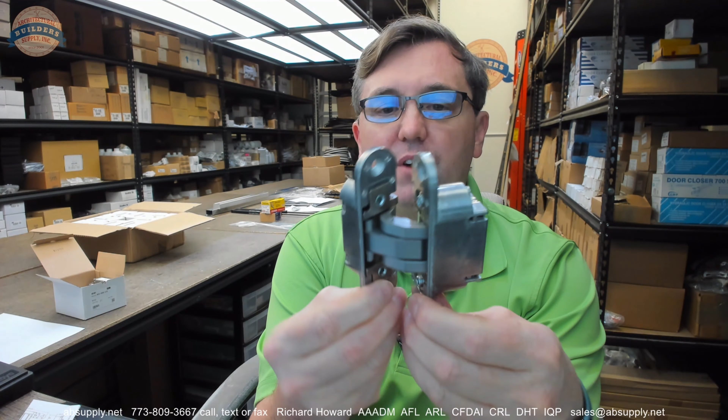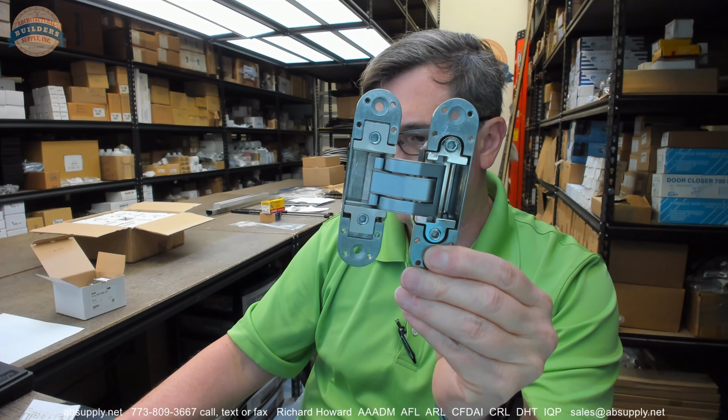They operate in such a way where they will provide an incredibly clean, finished look to the overall opening and aesthetic of what you're dealing with. This is a little bit smaller of a size, and I don't know the weight rating for this, but we're going to get to that when it comes to hinges like this.

So the entire premise of an MK80 type hinge, whether it be McKinney or anyone else who manufactures them... I'll tell you the McKinney is priced very well compared to its competition. I don't believe you'll hit a price point like this McKinney hinge.

The reason people like them is because they're able to adjust the door in the opening in 3 dimensions. They can get a little lift, they can get a little lateral, then they can get a little side-to-side adjustment.

And every time that I speak to people about these, usually the conversation is they're dreadfully fearful of using the classic hinge that is available in the market and has been for decades by Soss. Everybody knows the Soss name. There are people that are just dreadfully fearful of those because there's no concept of adjustability. Your mortising must be exactly spot on with no tolerance for deviation, period.

That prospect to many people, and let's face it, if you had 100 people who installed these hinges, how many of them are doing it for the first time? 90? Okay? So to the overwhelming majority of people, the concept of an adjustable option is absolutely, as soon as they hear that, they're like, done. That's the one I want. And that's the prevailing attitude with this type of hinge.

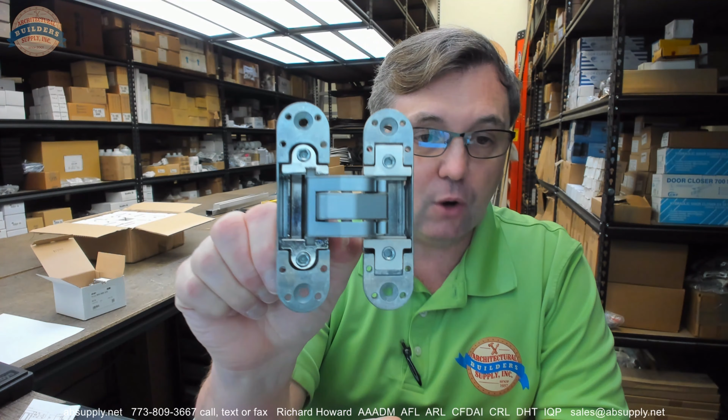Okay, but with this 3-way adjustable model, it substantially reduces the requirement of utter precision, and I think it substantially reduces the anxiety over that. It is a smart idea to be able to adjust something. I certainly don't deny that. My concern over this concept is you have mechanical fasteners holding the door in position. You are mechanically adjusting this hinge. What happens when the screws get loose?

Okay, that's my concern. I have spoken to a client of mine who has been using this concept of hinge for a decade, and I expressed my concern, and this gentleman in purchasing had told me he had never had a single complaint of that. So I was greatly relieved when I had heard that.

So this video is going to be a visual tour of the 80A. You're going to get a hinge. They're sold as each. If you buy two, they're going to come in one box. If you buy three, there will be one in a box and two in a box. Doesn't matter. They're just sold as each.

You are going to get the finish caps, and this is a satin chrome version. And in the satin chrome version, these are just plastic caps, and they literally push into the preparation on the hinge. You can see these 4 small holes. Okay, and they're just going to dress that off.

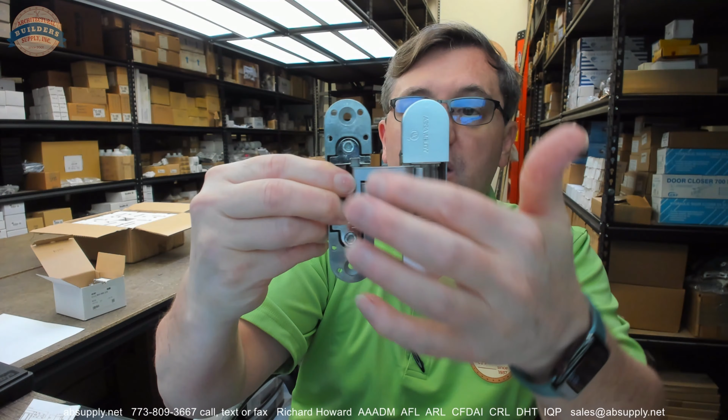And clearly, those caps are available in different finishes. The knuckle assembly has to be ordered in the proper finish, but the caps are just swapped out. So you'll get those in the color that you request. There will be 4 needed per hinge. 2 of them have the corporate logo. Now, what's interesting is they have the UL symbol on there. And that means that they are permissible for use on a fire-rated door.

That would be the reason for having the UL symbol on there, because there would not be... I'm not seeing a reference to fire rating in their paperwork, however. Yeah, they do not indicate that they're fire rated in the documentation.

The fact that they have a UL symbol and a letter F right below it means that it would be not only fire rated, but approved for positive pressure testing. The capital letter F is how you know it's positive pressure rather than neutral pressure. A lowercase f is neutral pressure.

I'm going to pause this video and ring McKinney right now and confirm whether or not this is permissible for use on a fire door, because obviously that's going to be a game changer if you can or cannot. So I'll be right back.

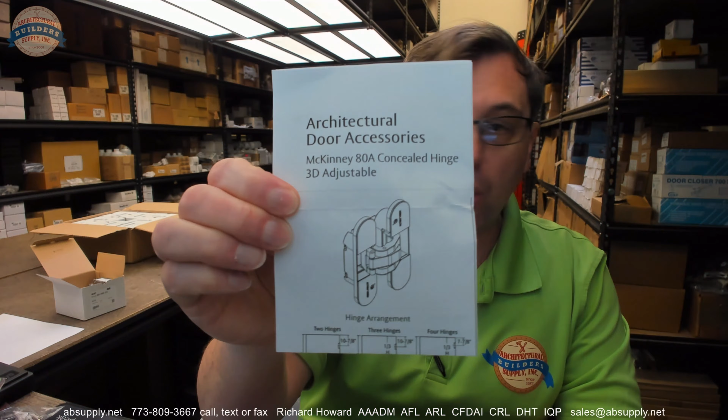So we're going to get those components along with the installation instructions, and we're going to go over those in this video here. And the customer service rep is typing, and they've stopped typing. So while I'm waiting for this answer to come back, what needs to be immediately understood about this premise of hinge is 2 things come to mind.

When you have an overhead stop, okay, McKinney has sister companies that manufacture overhead stops. That overhead stop must be ordered. They've told me that they have to email me the answer. Okay. So the rep has told me that I need to email tech services, so if I get that answer during this video, we will obviously have that answer.

So when you are dealing with an overhead stop, you need to order the overhead stops and specify the means of hanging the door. If it's hinges or 3/4 inch offset pivots, I wouldn't worry about it. Your template's going to work out of the box. If you're doing a concealed hinge like this, you need to go to your overhead stop people and say, I need this overhead stop for this application.

I've got a door so wide, and this is the hinge it's hung on, because the templating is going to change. You can count on it. Don't count on it being the identical templating. I've had people install material with standard templates and then use concealed hinges, and they say, well, the door swings, but you can tell it doesn't swing fluidly. It seems to grind or slide or get hard as it opens, and yeah, that can be expected.

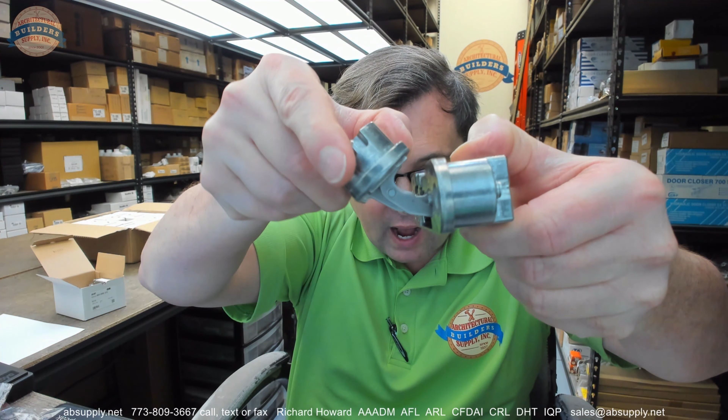The reason is because if you just focus on the center of our hinge, on this point where the intersection would be as I open and close the hinge, with a hinge or a pivot, center hung offset, the vertical axis of pivoting is a static plumb line. It doesn't move. With a hinge like this, that vertical axis of pivoting actually moves, okay?

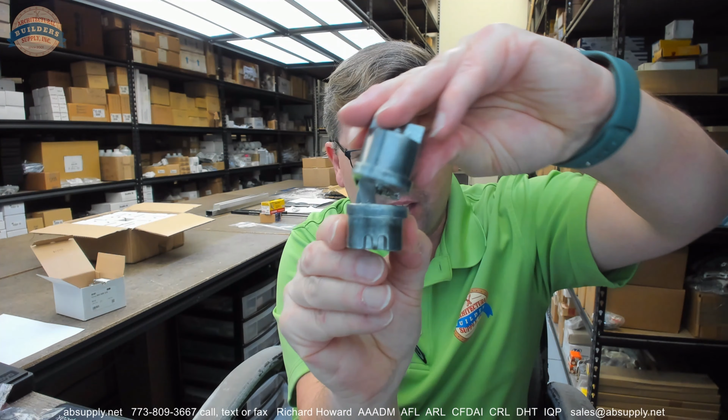And that's the problem that you have with not calling it out. Now, the other problem with not calling it out: you won't get the template. Now, you can get the template. You want to make sure it's going to work, but they will cost more.

And I don't believe there's any change in hardware, but the reason it costs more is they have to do paperwork, or they have to confirm, verify, research, things of that nature. So that's absolutely crucial when it comes to these hinges.

The other thing that's absolutely crucial when it comes to these hinges is you can see when the door is closed and then you open the door to 180 degrees, this is a very fixed amount, okay? This is a situation where the back set of the hinge, as measured from the pull side, so not the hinge back set, but the dimension from the pull side of the door to where the prep starts, can only be up to a maximum dimension.

Otherwise, you'll go to open the door, and then all of a sudden the outside corner of the door will have a conflict with the frame. So observance to the template is mandatory for that dimension, that you do not exceed that permissible dimension. So those are the two major caveats with this material.

Why is that latter an issue? Well, if you have some chair rail on a wall, if you have some sort of applied molding, if you have a deep inset, this hinge is not going to work. McKinney's line of three-dimensional adjustable hinges is garden variety material. They do not have a broad offering of what are ultimately very unusual hinges to account for applied material.

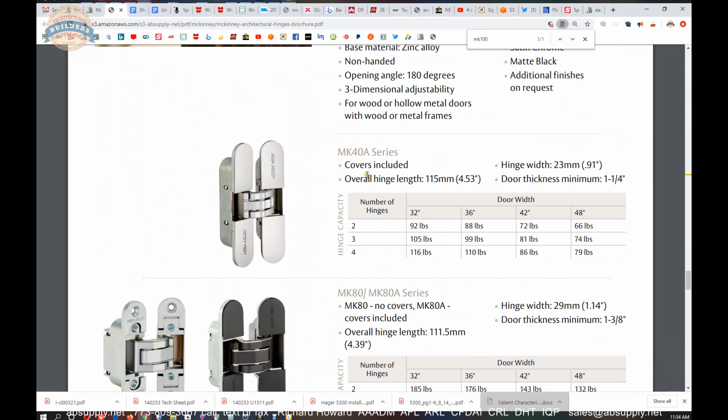Okay, so this is the item that we're looking at, and by the way, I did get a response from our tech support contact at the manufacturer, and they told me that the MK80 and the MK100 are indeed rated for 20-minute applications. Okay, so we have an MK series. We've got three hinges. The MK40 is not rated at all. The MK80 and the MK100 series are 20-minute rated.

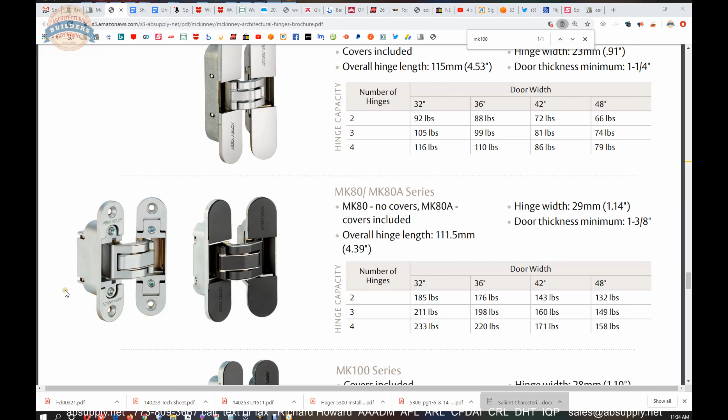You'll see that there's an MK80 and an MK80A. The MK80 does not include our finish covers. Okay, so that's going to have a different look to it altogether. Probably, and we'll explore it, but probably very little price difference between the two. So fire rating on the 80 and the 100 series. So here is our item, obviously shown here in the black finish.

That, of course, is an important area in which to start, whether or not your door is fire rated. If you have something that's beyond 20 minute, you have to, of course, have hardware that is listed for that type of application. This McKinney hinge is definitely labeled on the back side of one of the two leaves, which would be required for a hinge like this to actually physically bear a label.

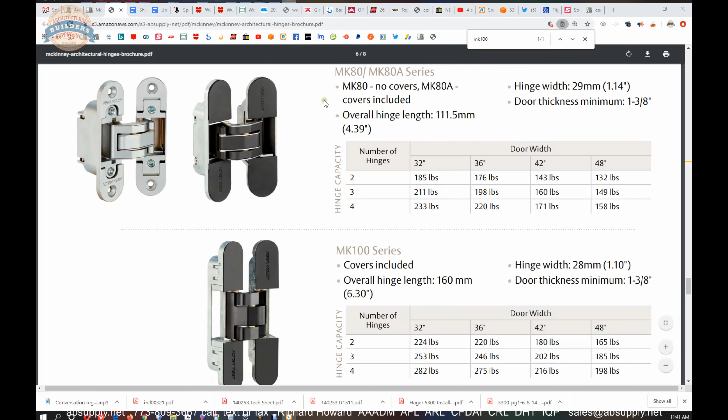And while I saw the label on the material and of course on the faceplate, it was of concern that it wasn't in the published documentation, which is why we reached out to double check. And plus it doesn't indicate a rating on here, so eliminating the guesswork and the lack of clarity about what it's rated for, now we know. So we're focusing on the MK80. Let's switch back to our item as seen here and work our way down.

Concealed hinge, satin chrome. This is obviously the black finish. Refined, minimal McKinney concealed hinges feature 3-Dimension adjustability for easy installation and door alteration. The snap-on covers conceal the screws for a clean aesthetic look, and that's what the MK80 does not do.

Concealed hinge, covers included, zinc alloy is the base material. Satin chrome would be a reference to the covers and the knuckle of the hinge finish. The size of the hinge, we're going to go over that when we take a look at the template. Your door will go to 180 degrees. You can go with a plus or minus 2 millimeter height and side to side with a lateral depth dimension of plus or minus 1 millimeter.

So 1 millimeter, to put that into perspective, 1 divided by 25.4 times 1, so it's 39 thousandths of an inch that you can move it. And obviously with 2 millimeters it would be 78 thousandths, or just heavy on a 16th of an inch. And that's certainly nothing to shake a stick at. If you want an adjustable hinge, that is going to give you some adjustability. There's no doubt. It's more than a 16th, and it's about a 32nd in the other direction.

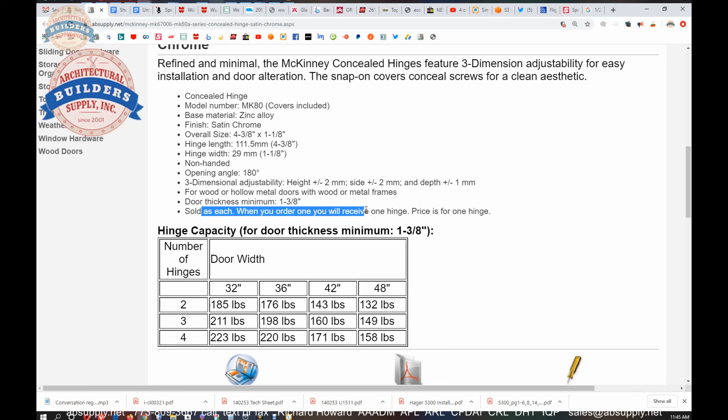This is another caveat, a minimum door thickness, which is the case for all means of hanging a door, whether it be a pivot or a hinge or a concealed hinge. They all have a minimum thickness, and this does, of course, too. Sold as each. When you buy one, we're going to ship you one. If you need 3, great, you can order 3, not a problem. And this is where it starts here, with how many hinges to use.

And what's nice about these is that they will handle a very generous weight range. So just 2 hinges are rated for what would be considered a quite heavy 3-foot door. So you're going to be able to easily handle 3-foot doors that are going to be incredibly heavy. You might even be able to do a simple 32nd lead-lined door. I'd have to look up what that weight is per foot, but you could probably hang a lead line door with it as well.

You can see, however, as the width increases, your weight capacity decreases, and that's pretty standard. That's evidenced by best practices as they are outlined in our industry. When your door gets wider than 3 foot, and most certainly 3 foot 6, 42 inch and wider, you're going to be at a taller hinge so that they can compensate for the wider door leaf. So you'll go from a 4.5 inch leaf to a 5 inch leaf in these areas. Okay.

So this is a very important document. Let's go back to the product brochure and make sure we haven't missed anything on that. Well, actually, from the beginning, this is a relatively new sort of publication from McKinney, and they've gone in an interesting direction with gravitating towards the ability to cater to the market when it comes to more unique solutions, perhaps more elegant looking solutions. A flat tip is in essence a button tip on your hinge, but that's clearly more decorative.

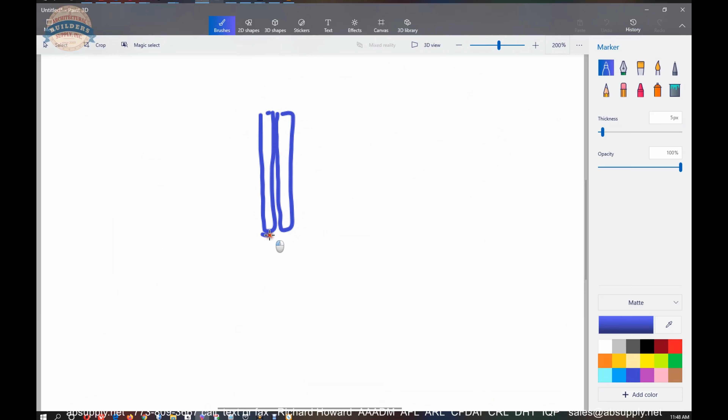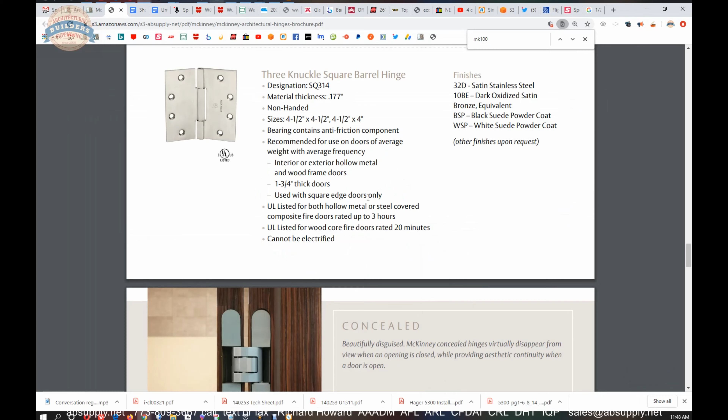Forgive the awful artistic rendering, but that hinge knuckle is going to literally look like this. It's going to look square so that when you're looking at it in elevation, you're literally seeing a square profile. Okay, those must absolutely be ordered as square or beveled, because if you imagine in your mind's eye how that door leaf is going to sit on the door, whether it's square or beveled, it's going to affect how those square knuckles in the 2 knuckle hinge line up.

A 3 knuckle version as well. Really nice looking stuff. Then of course they're concealed material, non-handed, so they can go left hand, right hand, doesn't matter. Flip them around.

3D adjustability. Your weight capacities are here, your minimum door thickness. Now, if you're doing full-size doors, the MK100 is really going to be more typical in a commercial setting, most certainly. I would say that if you're doing residential material, the lighter duty material would certainly be possibly more appropriate, or even the 40 series, because interior doors in a home are not going to be fire rated.

With the exception of possibly that garage door, the attached garage door to the house. That might need to be 20-minute rated or more. Depends on your local code. But let this information drive what direction you head in.

I don't see any trouble with weight rating on the MK80 if you're really residing in the 3-foot area. You get out here, you're really not going to see 4-foot doors that are going to be comfortably 158 pounds. 4070, 4080 - I really think you're going to be at the 100 series for commercial. That would be my option.

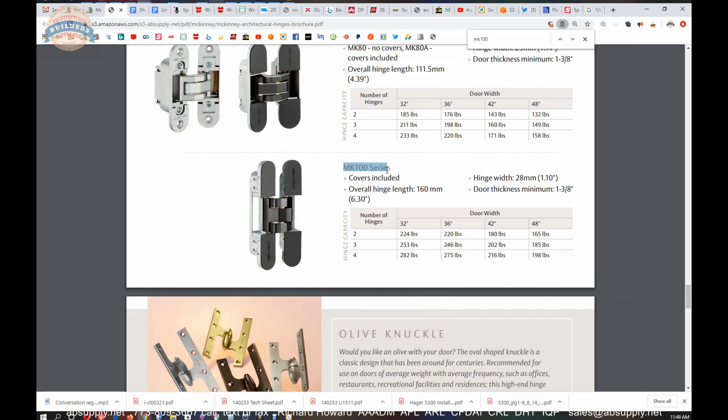I would prefer to have more hinge rather than less hinge when it comes to the lifespan of the opening. Olive knuckle hinges are neat. They're alive and well. I remember the first time I mortised a door for one of these, back a long time ago.

I stared at that template for probably a half an hour before I put my router around the door, just to make sure, because the problem was it wasn't referencing a center line on the template, and I needed to breach the face of the door for my leaf, and that baked my noodle for a little bit. But getting through that, learning how to read templates, is really the key to success, which of course does dovetail us into being able to machine for this material.

So let's move now to the installation instructions. Now we're moving on to the installation instructions.

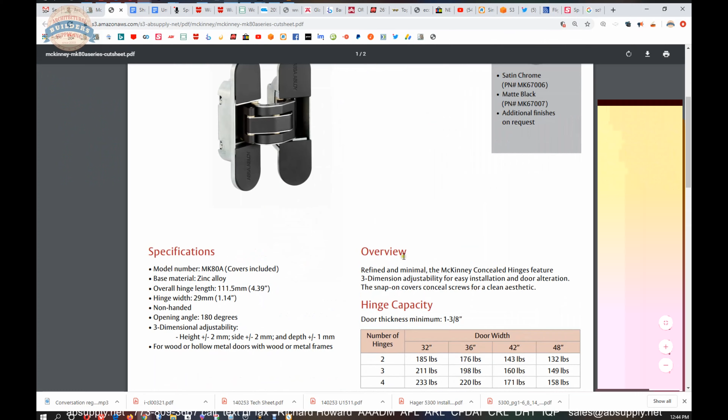Let's get the cut sheet first. There's probably not much there. It's a redo of the product catalog, basically. It's got a lot to do with the installation instructions as well. Shows you the dimensional properties that you're going to be contending with.

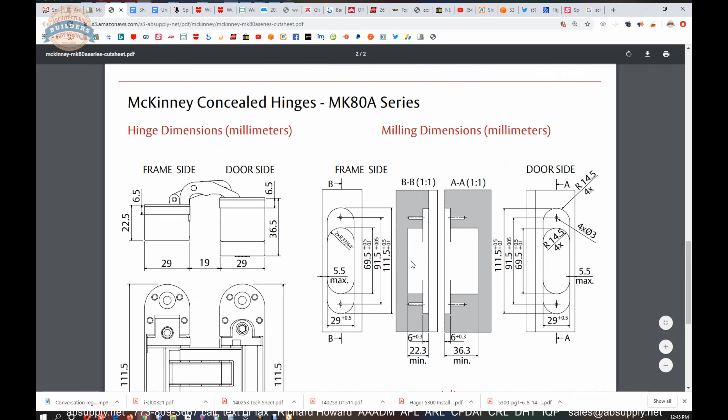25.4 is going to be the important number moving forward, and I'll explain that in a moment. But if you're going to include this paperwork in a submittal package, here would be your document.

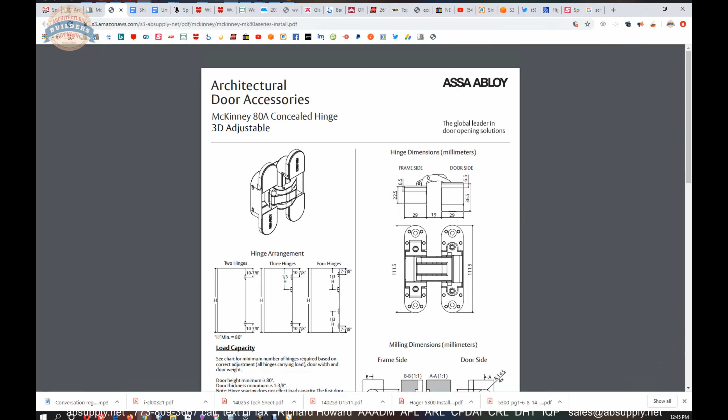Now let's tackle the installation instructions head on. So I've prepped for these, I've mortised for these. It's easy stuff - you just have to do what the template says. In terms of mortising this material, there's not a tremendous challenge to it, really at all.

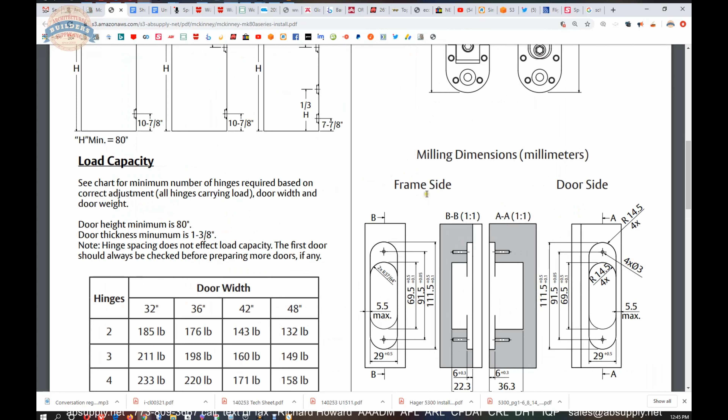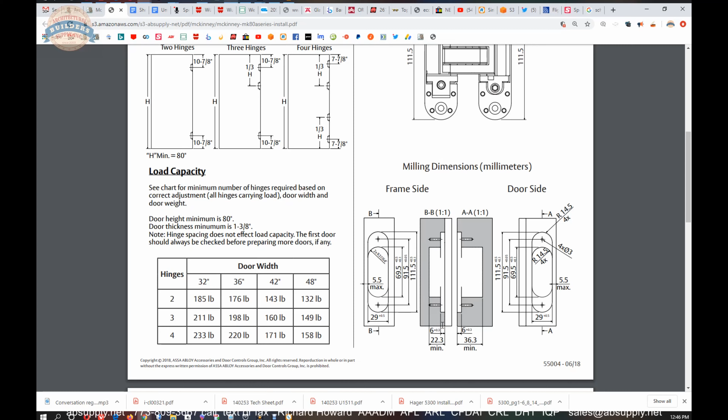What I find is you're going to make yourself a template, is what you're going to do. I'm not aware of McKinney having a template for these at all. Let's face it, door manufacturers that are going to be prepping for this material are going to use a CNC machine. There's no doubt about it. However, let's just imagine you don't have one of those in your back pocket.

You're going to be doing it by hand. So you'll make your own template would be my recommendation.

The way that I would go about doing it is I would drill myself a hole to achieve the 14.5-millimeter radius. I would just literally take a piece of 1x poplar, and cut it to the size that I wanted. I would prepare it in such a way that I had 5.5 millimeters from the pull face of the door to the face of the frame, and that's where you've got to have an understanding of what is your inset.

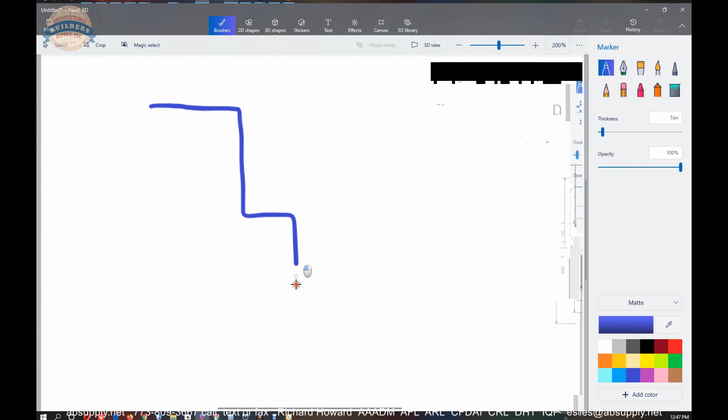So you'll have to account for an inset. You might determine your inset and you're going to have to adjust accordingly, because what I mean by inset is the face of the door. Let's just say this is your frame, single rabbet frame, whatever the case might be. Your door is going to sit in here. Here's an exaggerated bevel - the inset is the dimension from the face of the frame to the face of the door.

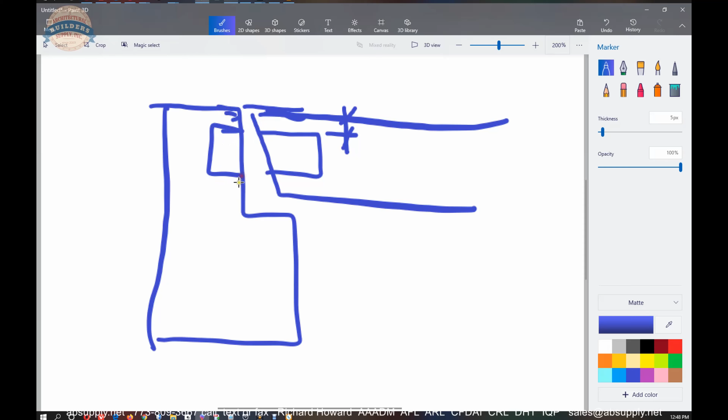And what they're saying is your prep cannot exceed that 5.5 millimeter dimension from here to here. So you have to add to that, obviously, what your inset is going to be when you're going to translate that template to the jamb itself, so that you've got 5.5 millimeter plus whatever your inset is, so that you can get your prep on the center line there.

So I would take a piece of 1x material. I would give myself a 14.5 millimeter radius prep here and here. They're saying that it's a 37/64 radius for the body, a little bit wider.

Or maybe it's not wider. Yeah, a little bit easier. Well, we can just translate it. Let's figure it out right now.

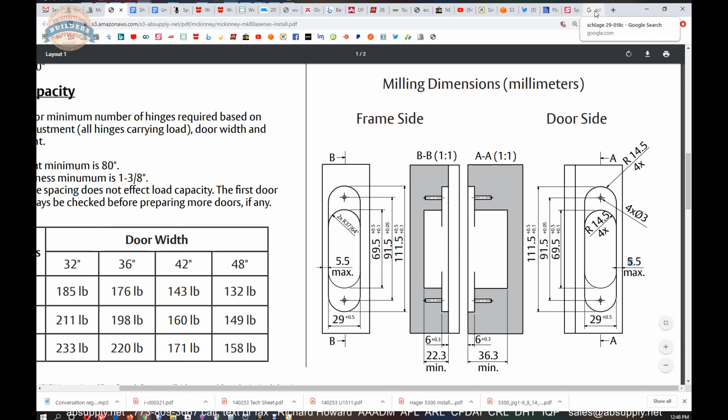So here they are at 37/64. That's the only dimension they have tossed in here. That's an imperial measurement that I see. Forgive me, I was thinking—I wasn't paying attention close enough.

So you've got a 14.5 millimeter radius. You know, obviously that's 0.57. So 0.5625 is 9/16. That ought to work for you.

I did not grow up when metric was taught in the school system. I don't know if you can get a 29 millimeter hole saw. If you can, that's what I would buy to make myself this one-time template.

And then at that point, what I would do is mark my 4 holes, and the way that you have to choose how you're going to do this.

So you can come up with a block so that you are not routing into this area when you do the deeper body prep.

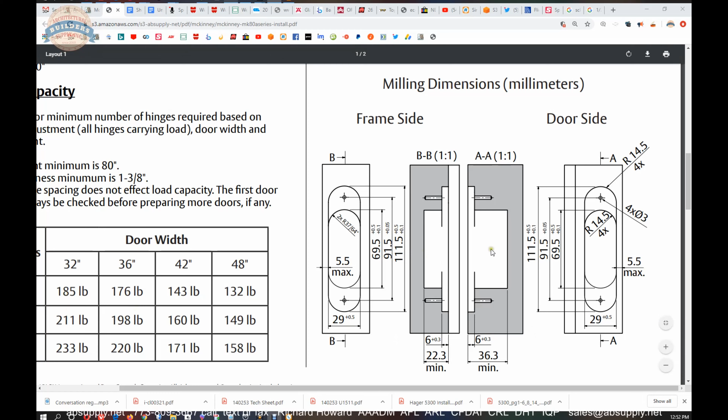So you're going to need, or you might just use two templates perhaps, or you could also come up with an insert that you would place inside of here to limit your router from going any further.

The issue with that is you're not going to have this type of graceful mortise unless you got super fancy. If they exist, a 29 millimeter diameter, 2-flute carbide bit, you might be able to toss that into your plunge router. That's interesting—a 29 millimeter router bit.

Yeah, I'm definitely not seeing that come up instantaneously here. So I'm definitely not seeing that. Going to need to come up with how you're going to go about doing that. You might use two templates.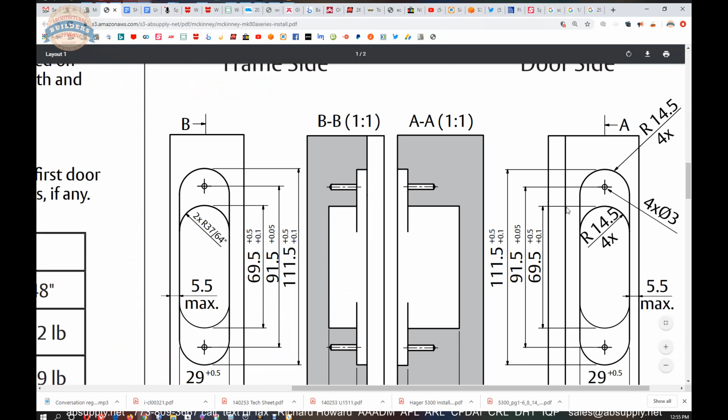I know there's another manufacturer that has an inserted pin. The issue with that is, so as you move forward, the way that you will ultimately end up doing this is how you'll achieve it.

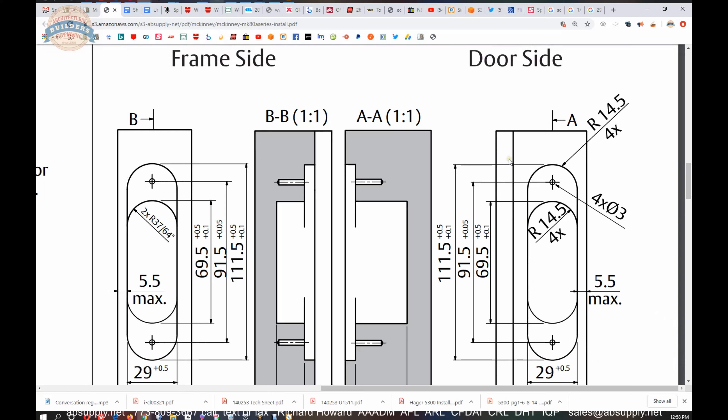I would just be using a template that I would be able to apply to the edge of my door. Obviously, a template's going to have a couple of inserts where you'll be able to physically nail the template down to the edge of the door. How you'll end up going about fixing it down to the door.

Yeah, nails are generally what's used to do that. You might try to not pierce the edge of your door. Depending on the construction, you might find a different way to do it, maybe clamping it to the door. So you're going to need to, and I like to use a plunge router, just a 2-flute 1/2-inch diameter plunge router.

Now, if you were to have a hole drilled in the edge of your template and you inserted a roll pin into it, or a nut and a bolt or whatever you would insert through there, if this area here and here and here and here was not radius like this, it's not going to be the end of the world.

Because it doesn't matter. Just so long as, if you were to basically cut this straight across, it's really not going to change anything on the hinge prep whatsoever. So I wouldn't hesitate in doing that if it served getting it done better.

And if you were to do that, you might insert a couple of rods, not worry too much about the prep on the inside corner, and have a nice easy prep. Then the only thing you have to know at that point is how thick is the faceplate and how deep to make the pocket on the door and jamb.

And you can very easily use your stop on your plunge router to get you your depth. 22.3 millimeters, 36.3 millimeters. Then your plate thickness is 6 millimeters plus, I guess, a third, or 0.3 millimeter, I guess is what that means.

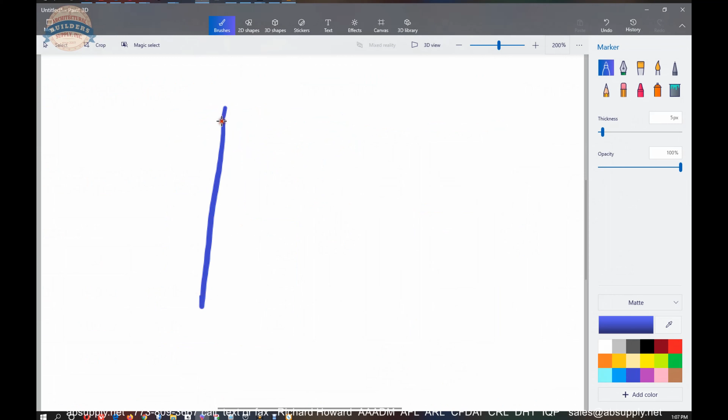So if you're doing a door and frame and you have—you've got a door, that's awful.

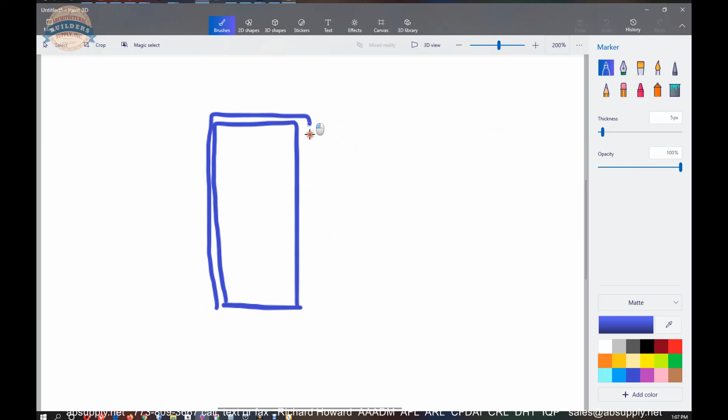You've got your frame. Okay, the question becomes what's the margin in here? Is it 1/8 of an inch? Great. So what you measure underneath on the underside of your head to the center of your prep, when you translate that dimension to the door, deduct it by 1/8. And then you're going to be perfectly in alignment. There's no way to get it wrong.

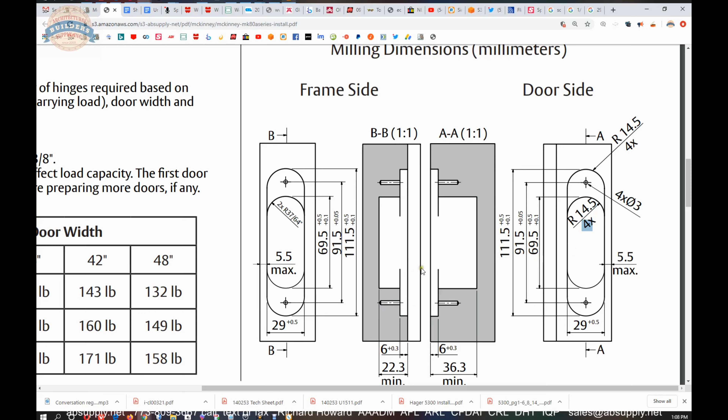In fact, when you mortise it that way, you're not going to need any of the adjustments. And in fact, I think the adjustments will become a bit of a hassle because you have to adjust it. So at the end of the day, that's what we're dealing with. So that's the hard part of the entire installation process that we just blew through. Let's start over with the easier stuff.

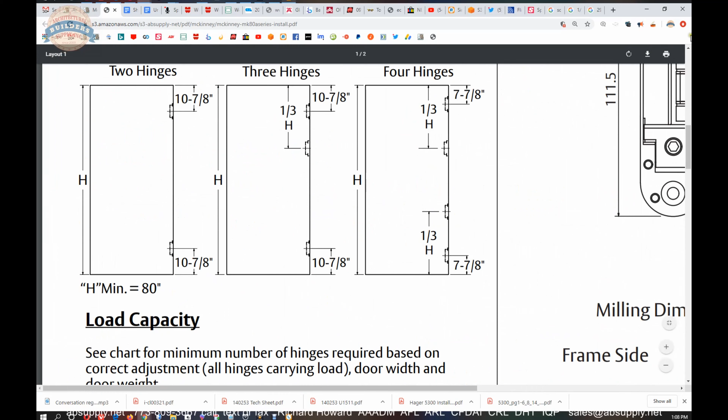You're seeing right here the factory's recommended placement for 2 hinges, 3 or 4 hinges. Now what you're going to notice is the location for 3 hinges. They want you to soldier stack those. Well, not soldier stack, but you know what I mean. Bias the middle hinge towards the top of the door by coming a third of the way down.

The issue with that is that's not going to meet the criteria for industry published standards for location of hinges. So I would be cautious. If you're doing wood doors, I would contact the wood door manufacturer before selecting these hinges and get in writing that any warp in the door will not be attributed to a location of hinges as laid out here, okay?

Because industry standard is for doors up to 60 inch, you use 2 hinges. For every 30 inches after that, you add another hinge. Well, the problem is we're going to have more than 30 inch in this space. I mean, you're going to have more than the margin of adding another hinge. So I would want to get that clarified before I move forward.

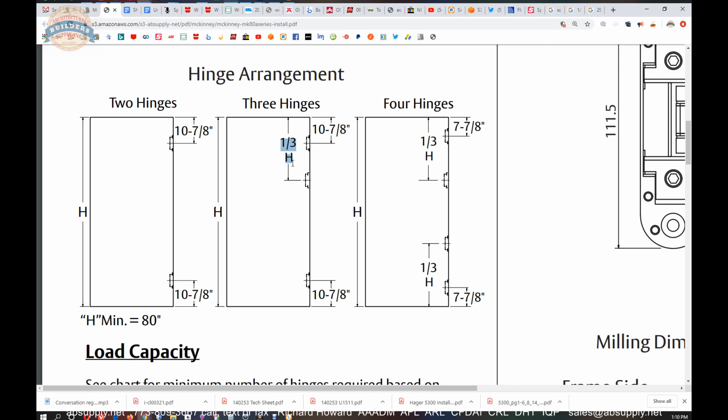But you'll see these 2 hinges at the top as standard practice for places in Europe, or if you've been on a cruise boat, you see it as well. And the reason you see it on cruise boats is because many cruise boats are built in Europe. That's where they put the hinges.

Your load capacity is mentioned here that we talked about earlier. It's important to note they say the hinge spacing does not affect load capacity. The first door should always be checked prior to preparing any more doors. So where you locate the hinges are not going to affect your load capacity.

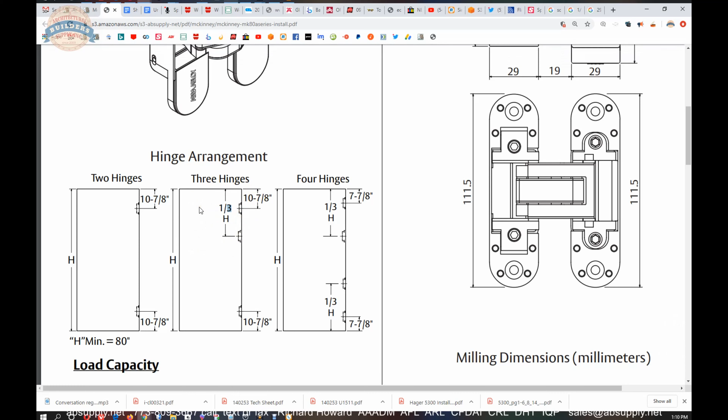And that's because you're biasing that third hinge towards the top. 70% of the weight of the door is borne by that top hinge. So if you're going to have 2 hinges or 3 or 4 and you're observing this chart, no, because the placement of the hinges is directly related to the load capacity. So if you were to change the locations here, then all of a sudden this statement is not necessarily accurate.

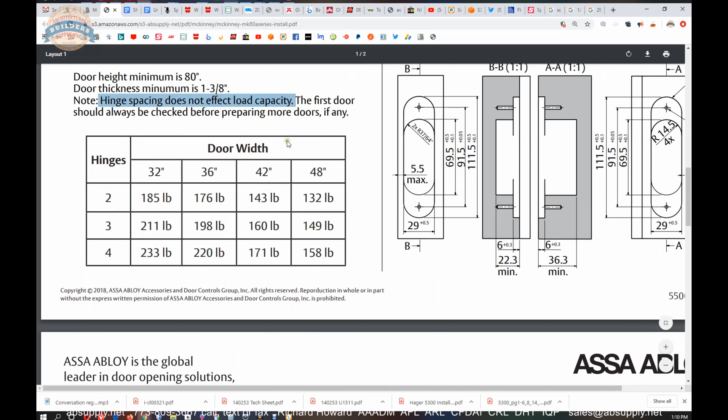Minimum door thickness 1 3/8, minimum door height 80 inch. I don't see why you couldn't put it on a door that was 6 foot tall. I don't see a problem with that. But what they're saying is prep your first door, double check everything, make any adjustments, then proceed.

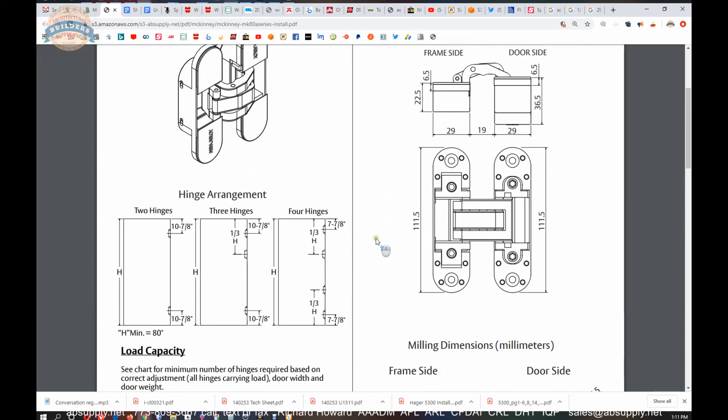Okay, so we've covered the first page. They give you those overall dimensions, but everything you need is here. Now I had said 25.4 is an important number.

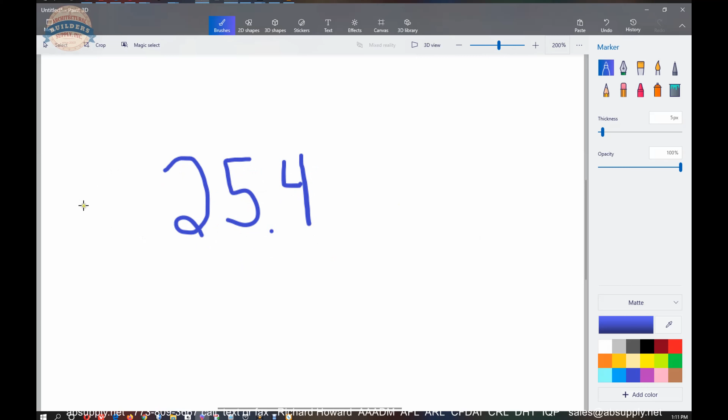The reason it is, because, as I said earlier, I didn't grow up being taught metric, but there's no reason to have a problem with it because of 25.4. If you're in the door business, you understand decimals. Well, metric is nothing but decimals. So 1 divided by 25.4, multiplied by whatever number you need.

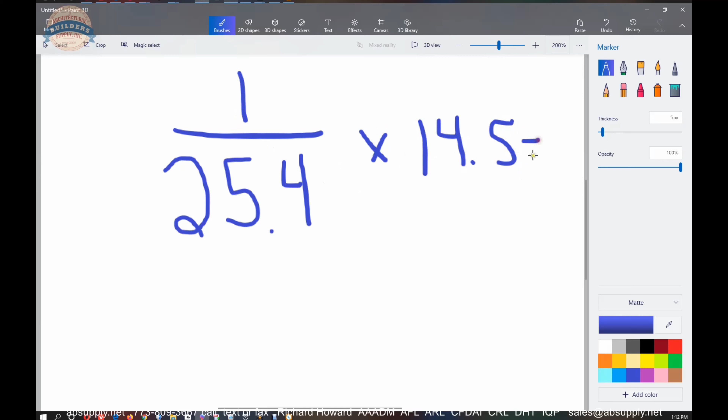So if you wanted to find out what 14.5 millimeters is, 1 divided by 25.4 times 14.5 was that 0.57 number we had earlier. So again, just 1 divided by 25.4 times 14.5. Okay, it's 0.57. And in my head, I know what 9/16 is. It's 0.5625. So I'm just going to be heavy on that, like a 30-second heavy on it.

So the point is when you're looking at that template, if you need to break it down into these numbers and then look at your fractional chart, and knowing what fractions break into to decimal points, that's how I do it. I don't have millimeters memorized. I have no reason to memorize them because I can break that math down.

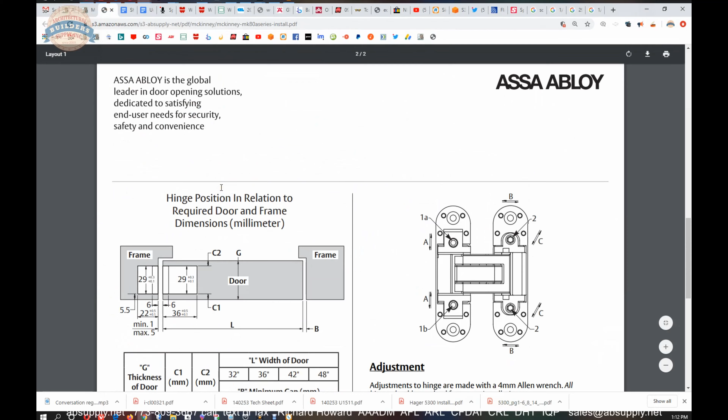Here's a great little cross section showing again what we're contending with, but this is just a regurgitation of what we've gone over. But they're giving you the information laid out in such a way that you can relate it to different door thicknesses. Now, and I have a comment about this. They have door thicknesses, 1 3/8, 1 3/4, 2, and 2 1/4. They have a C1 dimension, which we know is that crucial 5.5 millimeter.

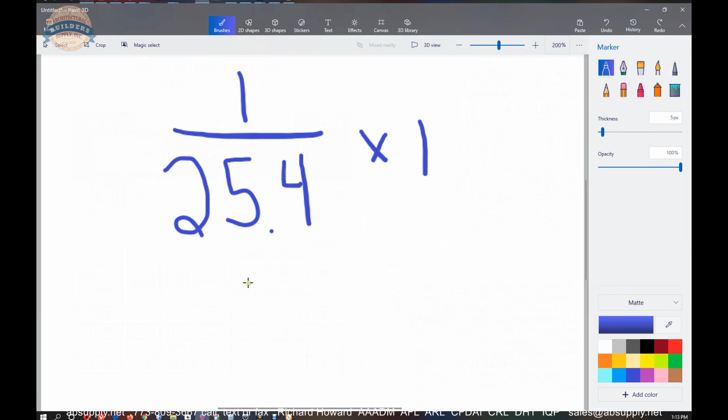And they're also giving you a C2 measurement. That's nice, but I wouldn't touch that C2 measurement. The reason I wouldn't worry about that, as long as your C1 dimension is absolute, the reason that I wouldn't worry about C2 is because a 1 3/4 inch thick door does not equal 1.75. If you put your caliper on any door, I guarantee you that 99% of the time

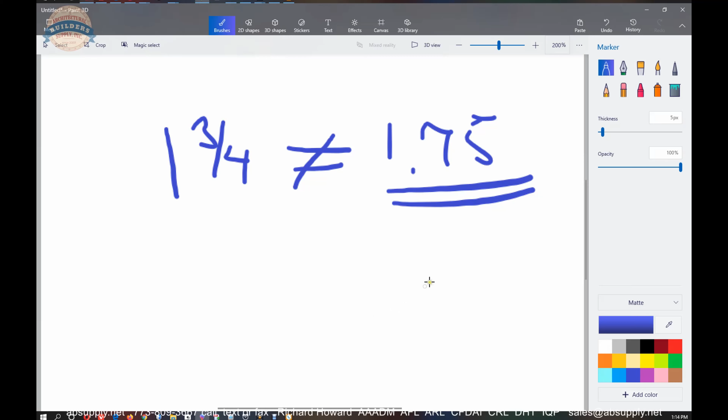it's not 1.75. Fire doors are going to be 1.71, 1.72. 1 3/8 doors, 1.31. 14 gauge steel stiffened doors, 16 gauge steel stiffened doors, 1 3/4 inch, yeah, they're 1 7/8. So my point is, I would take C2 as a reference, but not an absolute, whereas not exceeding 5.5 is an absolute. Let's switch to the screen view where I can demonstrate why it's an absolute.

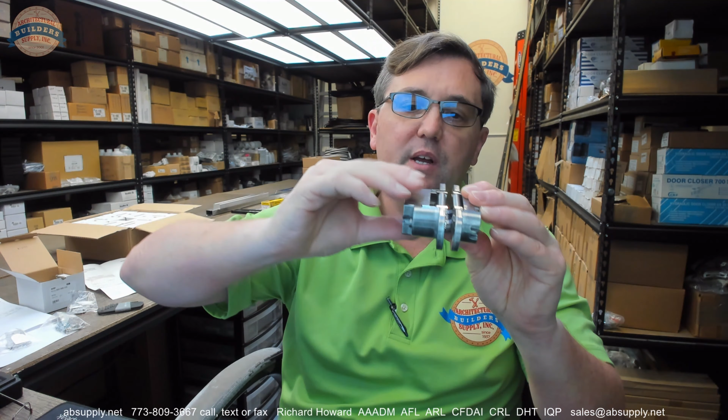So the reason that 5.5 is an absolute is because this is the door, and the door is going to swing out this way. If I put my fingers, and I imagine that this was the 5.5 millimeter, just watch what happens. I don't really get into any trouble with any conflict with the frame, just the tip of my index finger.

But if I were to increase that by, let's just say my tape measure, this is the new 5.5. Now you can see I'm now hitting the frame. So if my dimension from the face of the door to where my prep starts is greater than 5.5, I'm going to have trouble right there. I'm going to hit, and I'll never get my door even remotely close to 180 degrees. That's a gross exaggeration, but it serves to prove the point as to why 5.5 is such an absolute. Back to the camera screen view.

So then they show you in cross-section what your dimensions should be. They do not give you a dimension from the face of the stop to the face of the door. Industry standard on that, I would not go below 3/32 of an inch. If you find that you have a little bit of trouble, you might have to chamfer that edge over, just a very slight chamfer. You're going to want to make these beveled, in my opinion. This can tolerate a bevel door, because all that's going to do is make the hinge sit out this way ever so slightly.

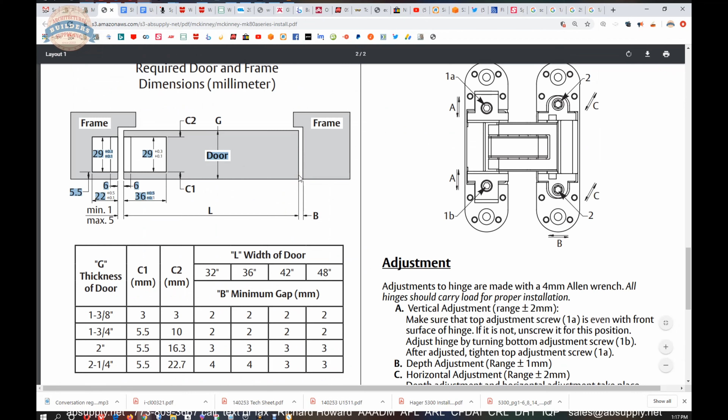I would be making my gap typical. I wouldn't go below 3/32, which is about 94 thousandths, and as much as 1/8 of an inch. 1/8 of an inch is very standard. 3/32 if you're beveling the door, 1/8 of an inch if it's a square edge door. And that covers everything that's here. Okay.

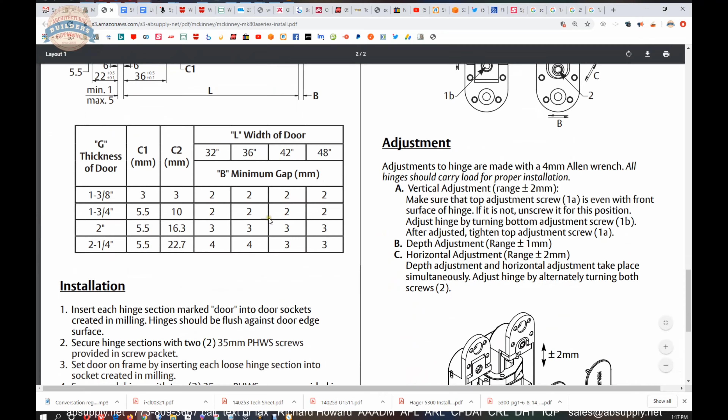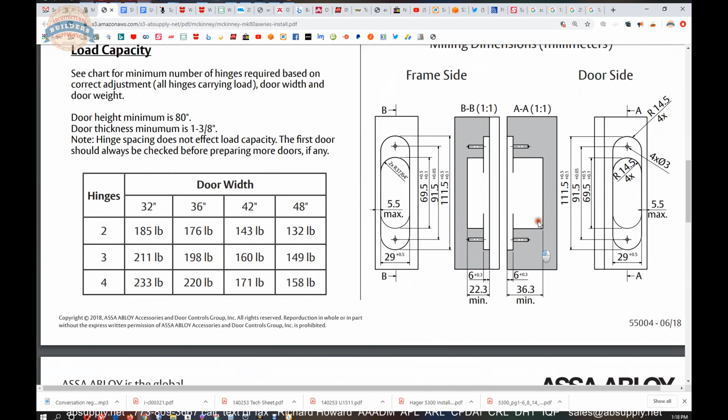Over here, they're going to get into how to adjust the hinge, and that takes a little bit of study. Installation, let's just cover this part. Insert each hinge section marked door into door socket. So literally on the hinge, not on the label. The adhesive label will say door hinge. That is not the door hinge portion. The door hinge leaf, so to speak, is the thicker, deeper, larger portion. They are clearly different depths. The door is going to be the bigger half.

What they're saying is get your hinges on the door, attach them. Then set the door on the frame by inserting each loose hinge section into the socket created in milling. I feel like whoever wrote this, the American approach to mortising doors is not their background. Socket and milling, we wouldn't call it milling, we'd call it mortising. Secure each hinge with your screws.

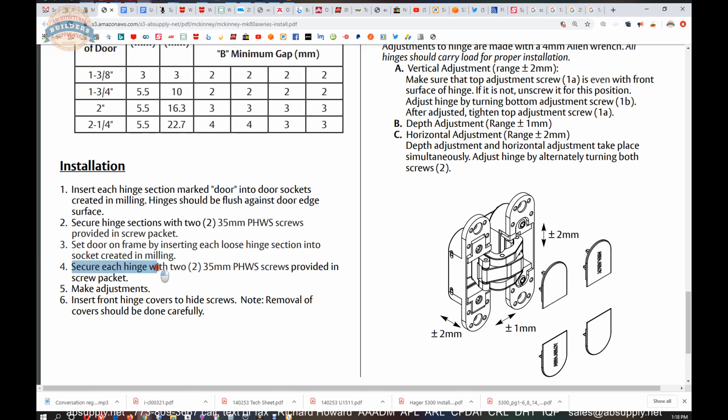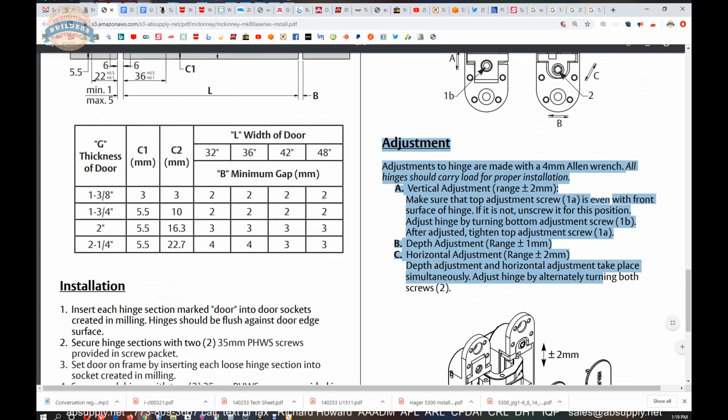Make your adjustments. That's when we get over here. And then after you are done making your adjustments, you're going to push your covers on to hide the screws. If you're going to pull them off, be very careful because you can easily snap the little plastic prongs. Now, let's talk about the adjustment, then let's demonstrate it on camera. In the interest of moving us towards the end of the video, let's just go over the adjustment by reading it. It's not obvious and straightforward what's happening here, in my opinion.

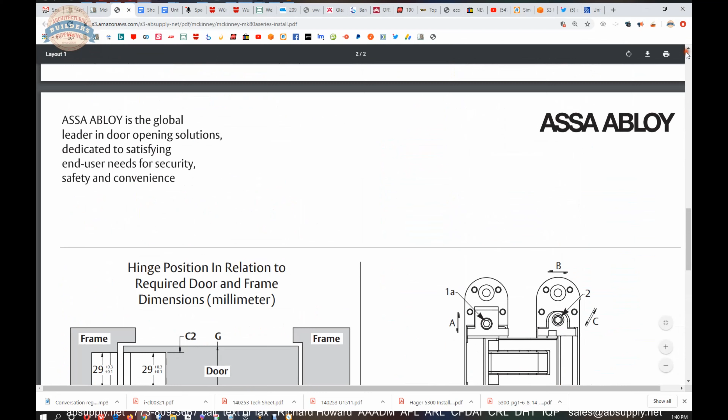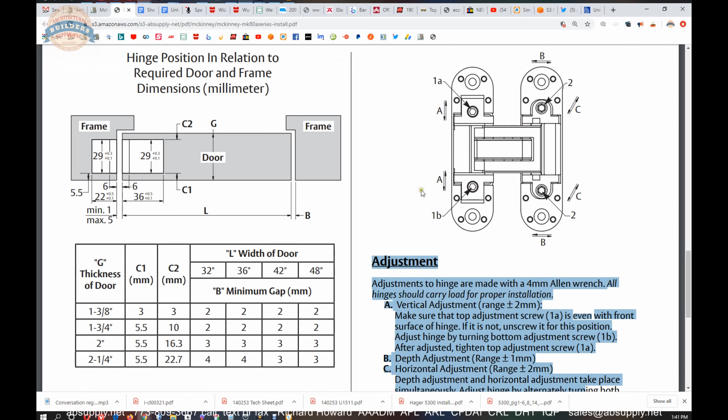The key is what needs to be done is an understanding that you have to move one screw a little, then move the other screw a little, then go back to the other one, and then the other one. You have to do it in steps because you have to make that adjustment on half of the hinge to then mate that same adjustment on the other half.

So adjustments to the hinge are made with a 4mm Allen wrench. Unfortunately, an Allen wrench is not included with this set. I wish that they were. Yeah, it needs to be 4mm. Well, it can be the imperial size, there is a very close imperial size. I forget what it is.

Well, obviously, what would we do? 1 divided by 25.4 times 4. Okay, so that's going to be like 5/32 of an inch, I think. 1 divided by 32 times 5. Yeah, so 1/1000th of an inch off. So 5/32 may work, but it doesn't fit as nicely. Just be mindful of that. 4mm

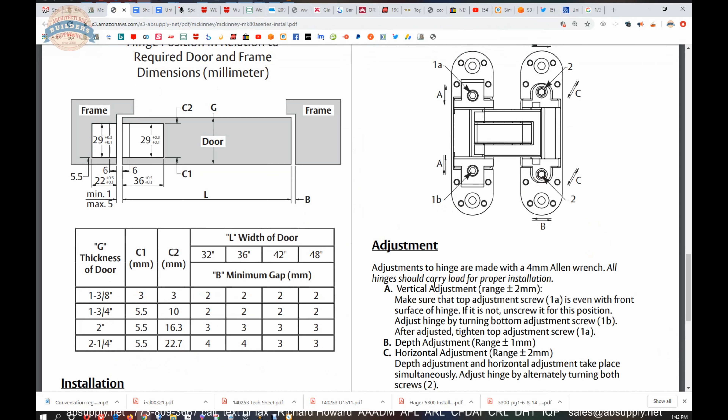Allen wrench. All hinges should carry the load for proper installation. I'm not sure what they mean by that. Just install them correctly. Your vertical is going to be literally these. You'll notice this is radiused. You'll notice this is square. That's going to be your vertical adjustment.

Vertical adjustment: make sure the top adjusting screw is even with the front surface of the hinge. If it is not, unscrew it to that position. You're going to want to make it flush. What they're really saying is that the screw itself can be below the surface or above the surface of the leaf, and I'll show that to you in a moment.

So the vertical adjustment is plus or minus 2mm. Make sure that screw is flush. If it's not, put it flush. Adjust the hinge by turning the bottom adjustment screw. After you've got it adjusted, tighten the top adjustment screw. So you need to put the top screw in its neutral position so that you can then drive the height accordingly, clockwise or counterclockwise, and you'll fix it with the top screw.

Your depth adjustment, your B and your C, are handled at the same time. That's goofy to say. They're not handled at the same time. The hinge has a range, let's say from far left to center to right to far right. The more you turn these screws, the more you will adjust the lateral position, then the depth, and then the depth, and then the lateral position in the opposite fashion.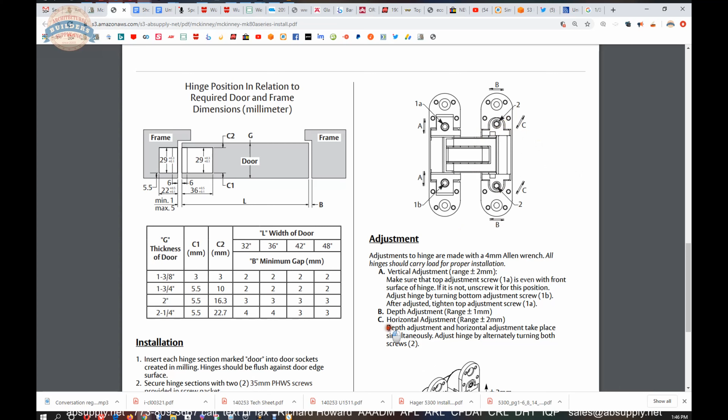Depth adjustment and horizontal adjustment take place simultaneously. Adjust the hinge by alternately turning both screws. Once you have that done, put your covers where they belong. Let's wrap up with a demonstration of the adjustment. So let's tackle the easy one first. You've got your hinge adjustment. Those are loose, you can see where that adjustment's going to come into play. And my top screw needs to be flush.

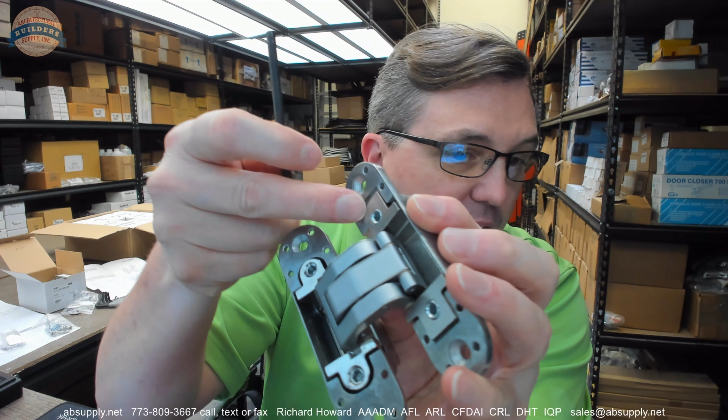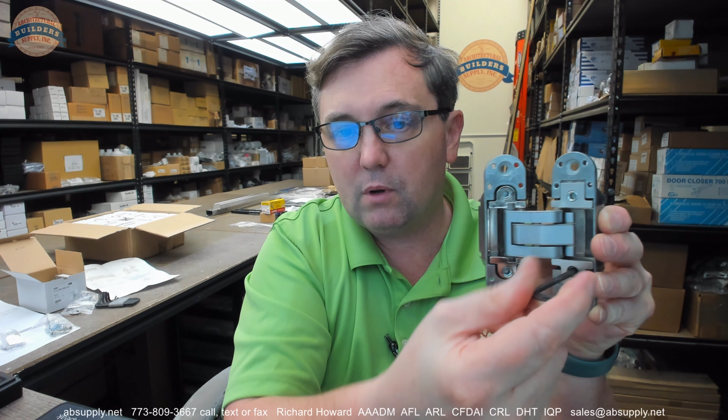So I can take my Allen wrench and turn that out so it's not flush, and I can turn it in so it's not flush. You've got to make it flush. Then at that point, you're going to hit the lower screw, and you can see how I'm adjusting the height. I've turned it all the way up. Now just watch the margin right here as I turn it counterclockwise. I'm dropping that down. Once I got it where I want it, tighten the other screw. Easy. You have to do it in that arrangement.

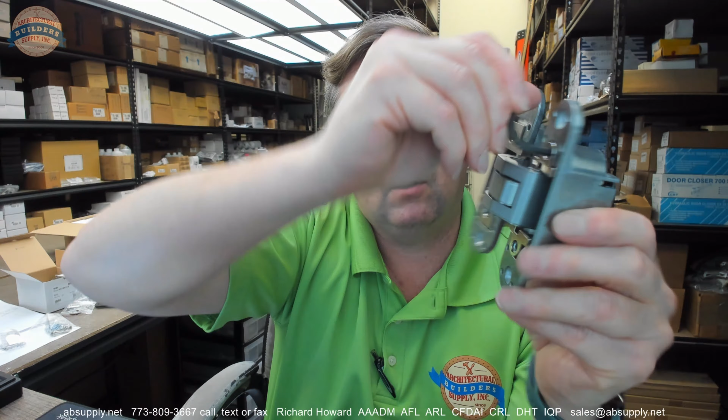Now, the side to side and the depth kind of adjustment. Right now I have that thrown out at its maximum. You can see that huge gap that's there. So as I rotate the top screw, if you just focus on this plate here, I can turn that maybe a half a turn before it's going to stop. And you can see how much I change it. Let's do this. I'm really changing that depth position.

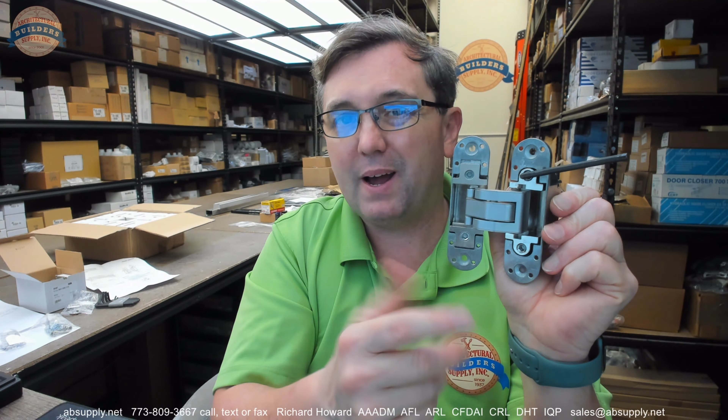I am a little, but I'm really not affecting my side to side. I'm affecting how the door sits in relationship to the frame rabbet in its pocket. But it'll stop as I turn it about a half a turn. That's because I've got to get down here and turn this one a half a turn as well. Then I can go back to this one and affect more change to it. Then I have to go down here and affect change to that. And when it gets firm, you go to the other screw.

And you continue to work it this way until you get a depth position that you want and a lateral position that you want. So I've taken these two adjusting screws and I've moved them in the opposite orientation. I've turned them all the way to their opposite. Now that hinge is far deeper in the pocket. So what's happening is the hinge moves this way, then this way. The hinge moves this way, then this way, and this way. That sort of concept. And that's how you have to approach the adjustment.

Okay. Other manufacturers, I have to tell you, approach it differently in the sense that there are more things to stick an Allen wrench into. This is pretty smart though, because you can literally affect how the door sits in its pocket, and its side to side, by using the same screws. You just have to do them together, well, one alternately, and then you have to go to the next hinge. So it's a bit of a tedious task.

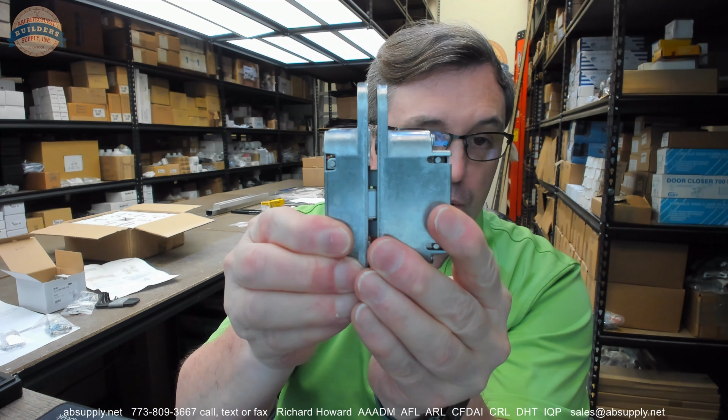And like I said initially, I spoke to a lifelong purchasing agent who has come out of manufacturing and the woodworking industry, and he has told me in at least 10 years he's not had a single complaint. Not on the McKinney hinge, but on the concept. So I've got to take that as firsthand knowledge. There's no doubt about that.

I think at this point it's time to wrap up the video. Nice quality company McKinney is. They are part of Assa Abloy. Assa Abloy is a multinational, multi-billion-dollar corporation. Assa and Abloy are known for high-security cylinders. An Assa cylinder is a high-security cylinder that has normal pin tumblers, but then it has a sidebar design.

The Abloy, their Protec, is a highly unusual high-security cylinder, super cool, that has a number of discs in it. And as you turn the key, the shape of the cut on the key itself will affect its relationship with that disc, and how the cut is on the key governs the rotation of that disc. And when all the discs are lined up, a locking bar, which is the fence, can fall into the gate, permitting the cylinder to turn. Really cool.